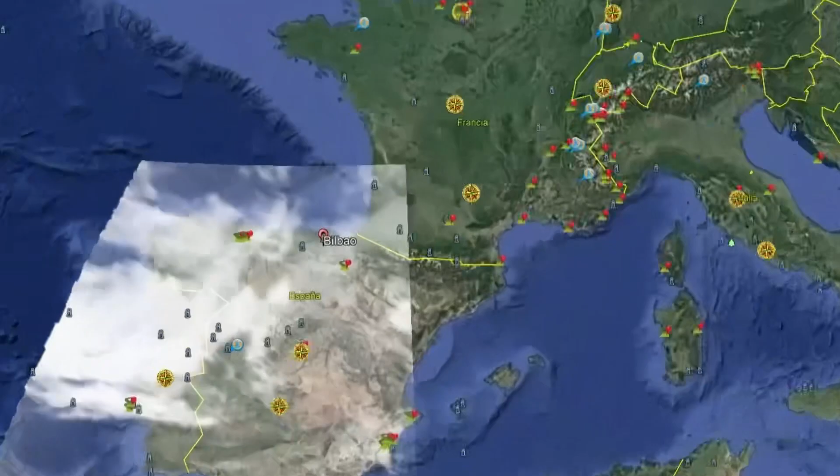The city of Bilbao is located in the northern part of Spain. It's one of the most important cities of the Vizcaya province and the Basque country. It has one of the most popular and touristic city centers, with the presence of the Guggenheim Museum, the San Mamés Stadium, and other cultural centers that receive around 1 million visitors per year, tourism being the main commercial activity of the city. It's located along the Nervión River.

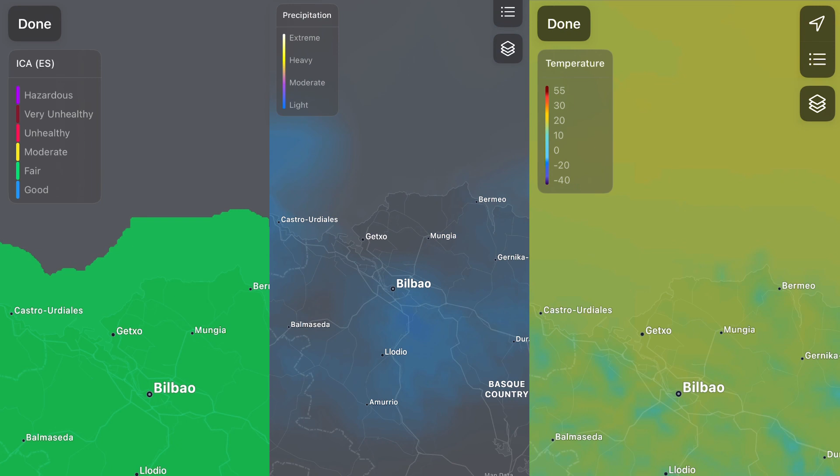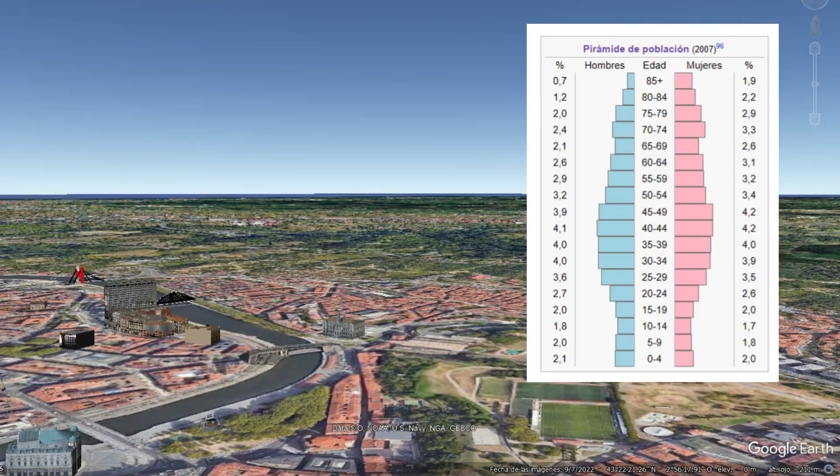It has a typical Cantabrian climate, with repeated rain throughout the year and a dry summer season. The population is diverse, since the percentages of young people, adults, and elderly are similar, but children are a minority. It's a city that has a peri-urban green area, forming the green belt of Bilbao, but the urban green areas are not connected to each other, which is not appropriate for the maintenance and conservation of biodiversity. In addition, the presence of invasive species poses a threat to the conservation of native species.

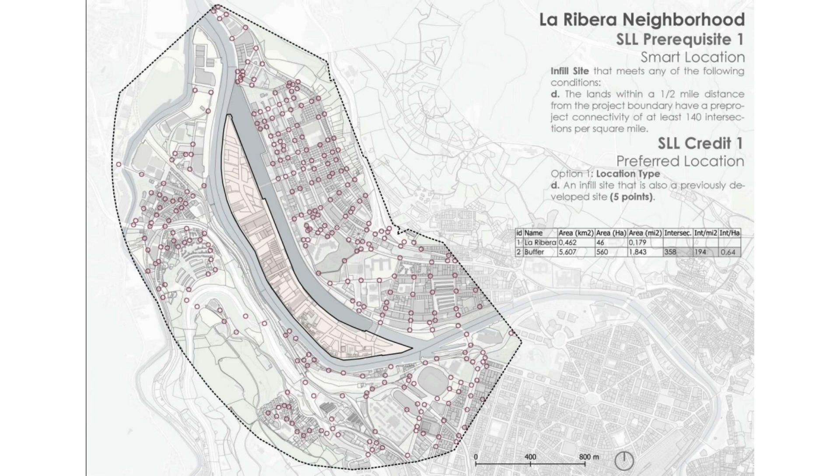The place where the project is developed is an island located in the middle of the river, an infill site that is also a previously developed site with good pre-project connectivity in the surrounding neighborhoods, but also isolated because of the lack of connection bridges. The island is a transit service location with one transit type, a line of buses with a low presence of bus stations and daily transit service trips.

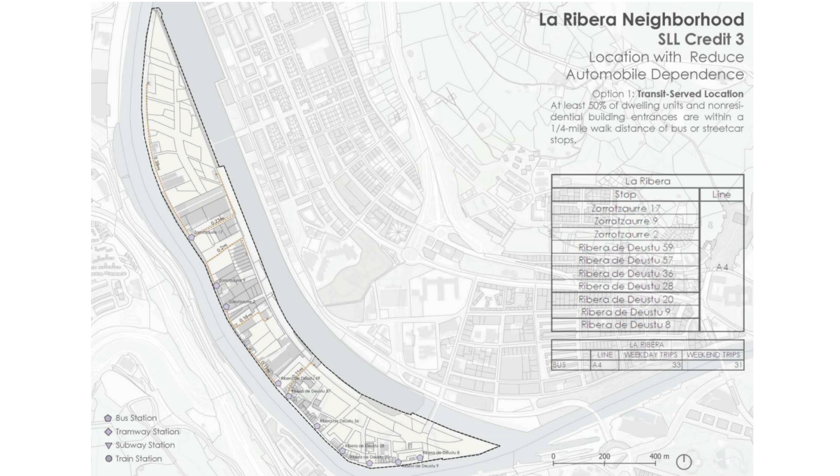There is no presence of a bicycle network and storage inside the island, and the outside network is far from the island boundary. The island is an industrial area with a medium presence of job opportunities, a low residential density, and huge walking distances from the residential zone to the activities, with an important presence of available land for mixed uses and non-residential uses, with a high residential density per buildable land and a low non-residential floor area ratio in the surrounding neighborhoods.

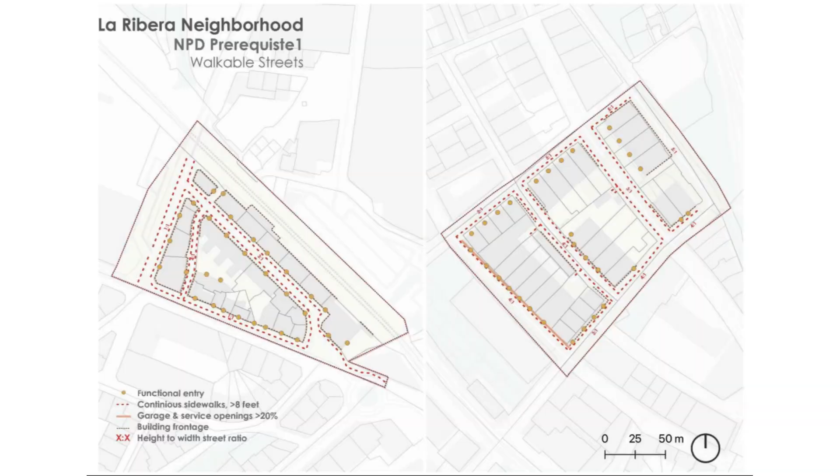With few continuous sidewalks and large industrial buildings, there is a lack of functional entries with a high presence of blank facades and an undefined street network. No public space such as a park or a plaza, as well as recreation facilities, are found on the island, and it is disconnected from the surrounding public spaces and activities because of the presence of only one connection bridge.

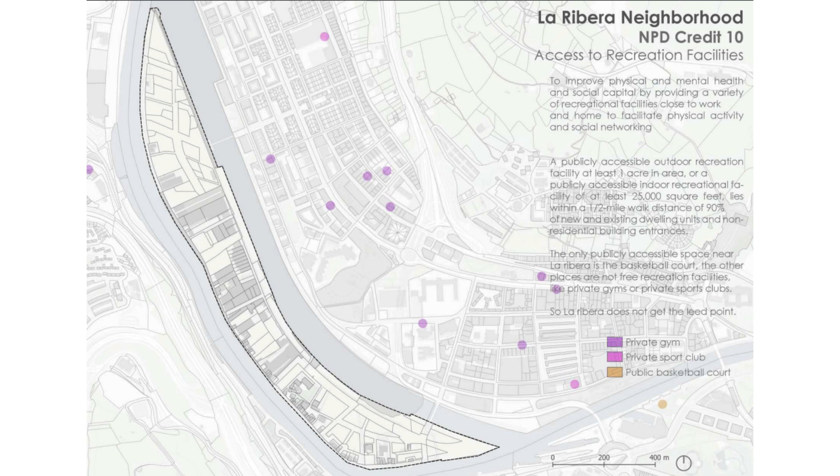With the objective of turning the island into an active mixed-use neighborhood and reconnecting it with the surroundings, being a place of connection and link in the middle of a river that disconnects both sides of the city.

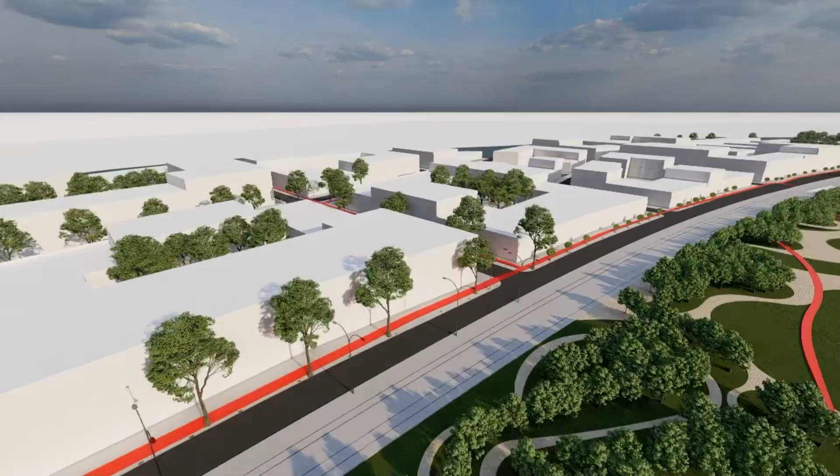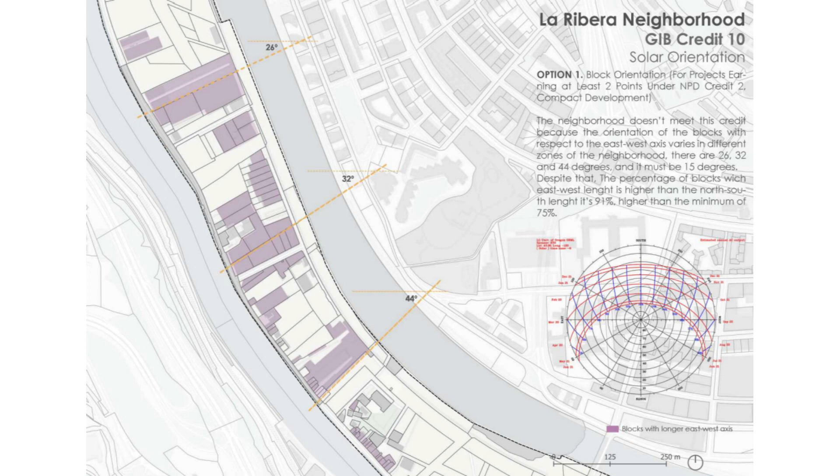The project proposal divides the empty island into 3 areas of intervention, with a variety of residential density, non-residential floor area ratio, and access to recreation facilities and civic and public spaces at different levels. But the main intervention is the creation of connection bridges for both pedestrians and cars. The new street network and the organization of blocks and buildings is based on solar orientation, in order to create optimum conditions for the use of passive and active solar strategies.

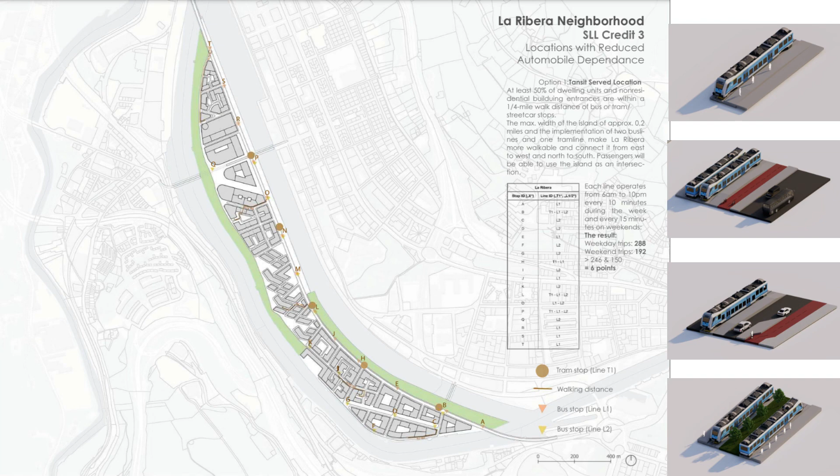The public transport network is located along the island with the presence of 2 primary bus lines in the main roads that connect the island with the surrounding neighborhoods, and other secondary bus lines that go inside the island. There is also a tram station and parking conditions for carpool or shared vehicles. The island also works as a connection point between the 2 sides of the river.

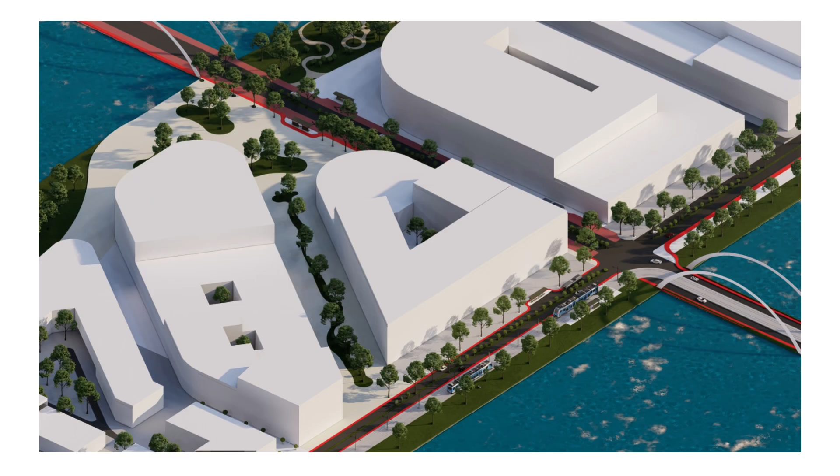This way, we include multimodal transportation choices and reduced vehicle miles traveled, with the correct public transport infrastructure, the organization of underground private parking and one public parking to invite outside neighborhoods, and the public transport and bicycle network. This way, we include multimodal transportation choices and encourage the use of non-polluting vehicles in order to reduce greenhouse gas emissions and reduce vehicle miles traveled.

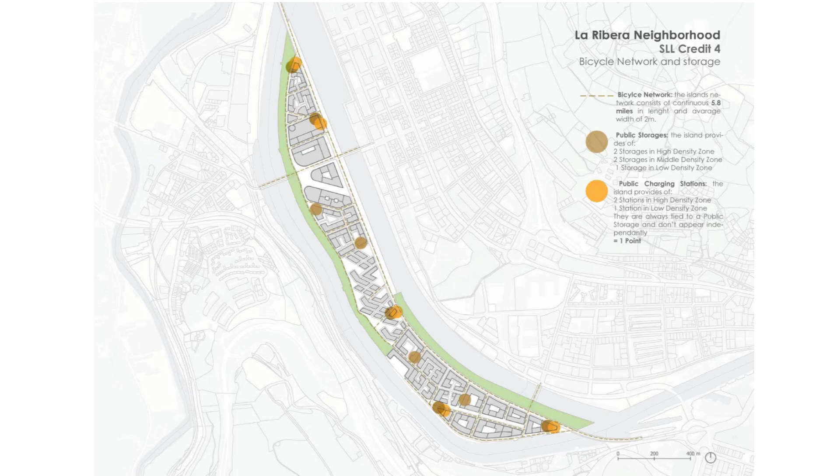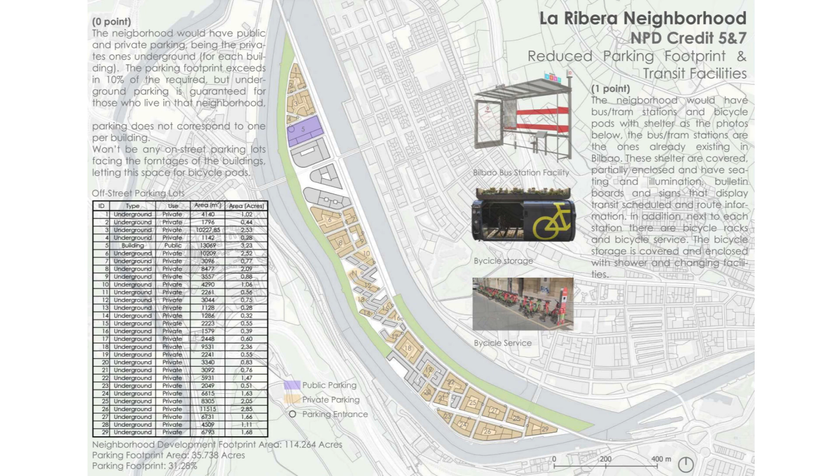The street network is designed by hierarchy, with a main car road that follows a linear axis and intersections that connect to the blocks, leaving most of the island for pedestrian paths and bicycle network, with a design of streets that provide safe, appealing, and comfortable street environments and promote transportation efficiency.

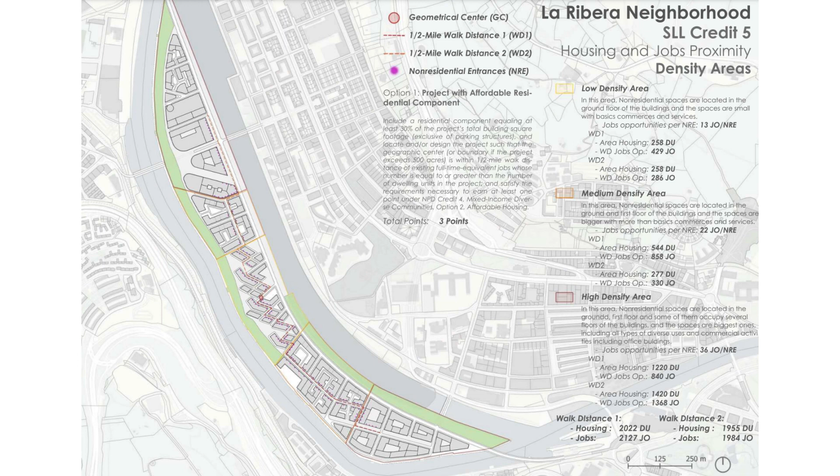Although the low-density area is located in the middle and the high-density area at the ends of the island, thanks to the mixed-use organization, the presence of job opportunities is higher than the total number of dwelling units, being located within a comfortable and achievable walking distance inside the island. They also encourage outside neighborhoods to develop work and activities inside the island.